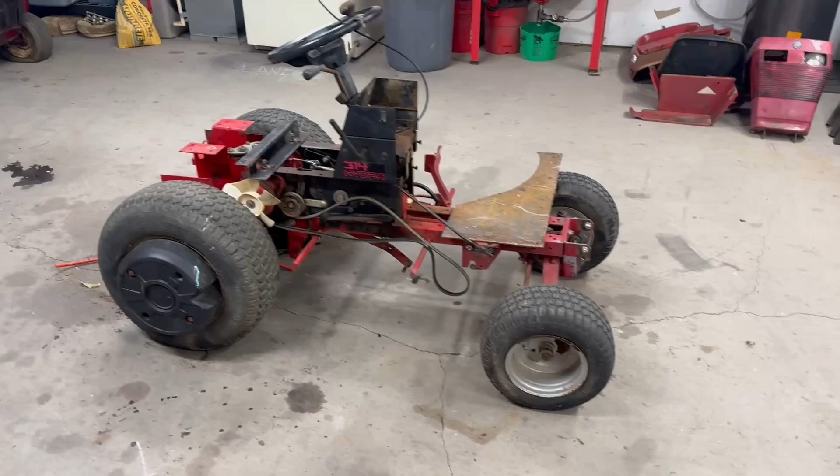We are back for part 2 of the 314 with a diesel swap. You guys saw in the last video, we got this thing stripped down, somewhat washed it, got it cleaned up, and I've done a little bit more work off camera, mostly because it's boring. I just pulled some more panels off and stripped a whole bunch of junk off this thing that we're not going to use anymore.

So as far as what we're going to try to get done in this video, we're going to hopefully get the engine fully mounted, get the belt drive put on it, and make sure all that stuff's working right. Make sure the transmission's going to work like it should. Yeah, so it's kind of time consuming work.

It's not difficult. If you guys are on the fence about doing this, it's not bad. I mean, it can't get any easier. These frame rails are nice and flat. It's not hard at all. But I'm going to go over how we're going to go about mounting this thing.

So anytime you guys go to do an engine swap, whether it be a Wheel Horse or a Lawn Chief, any kind of tractor that's got belt drive, you need to be aware of where the shaft comes out of the engine at. I'll show you what I'm talking about here. You guys can see on this Kohler here, from the faceplate or the bottom plate to the center of the crank is right at, I think that's about 6 inches. You go to the new engine, it's about 4 3/4.

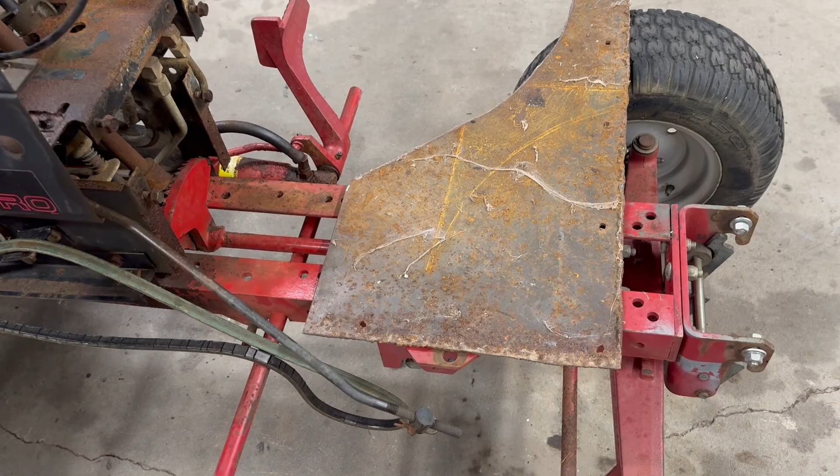Now that's important because whenever you go to mount this thing, if you do not have it centered where it was and the engine and the crank in the same position, your belt is not going to be routed properly. Now I want to retain the factory belt guards. I want this tractor to be as factory as possible when it comes to those systems. So to do that, you usually got to build a custom riser plate. Now that may sound complicated, but it's really not.

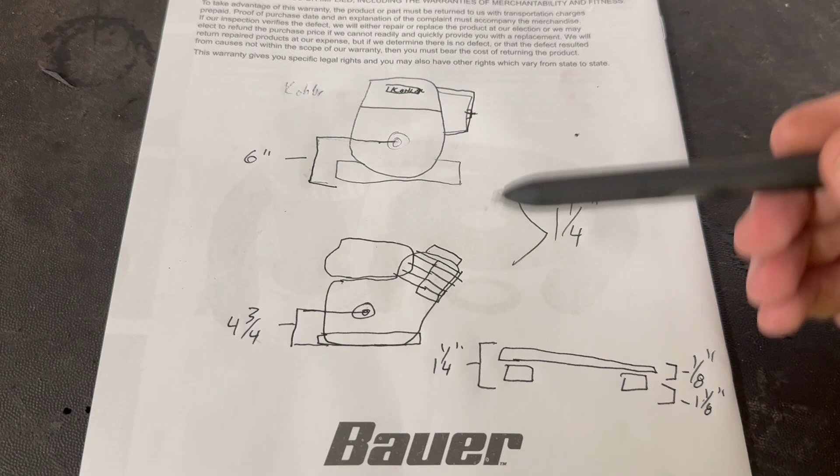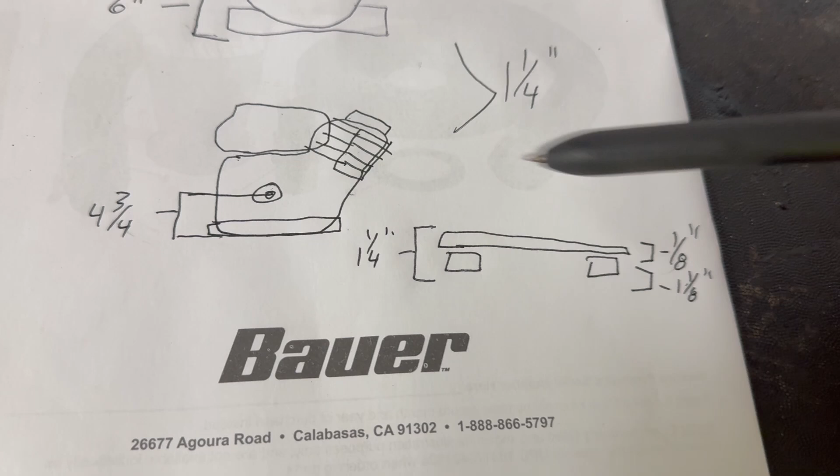So if you look at my crude drawing here, you can see the old Kohler was 6 inches from the base to the center of the crank, and the new engine is 4 3/4. So that means we have got a 1 1/4 height difference that we have to make up. So what I'm going to do, I've got an 1/8-inch steel plate. I'm going to cut a rectangle out of that, and I've got some thick wall round tubing. I'm going to cut some spacers that are 1 1/8 tall. So by the time you add those two together, that should make up the 1 1/4 difference. So the crank will be in the same position as the old engine was.

Now the other important thing to take into account is obviously making sure your engine is squared up to the frame, to the belt drive. We're going to go off the assumption that all that is parallel and squared up to the frame. So whenever we go to mount that engine, we want it to be square to the frame and in the same spot as the original one.

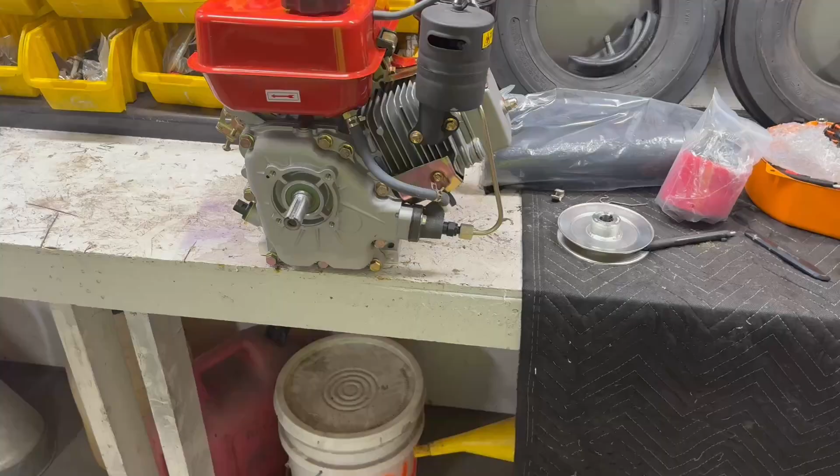Now these Wheel Horses make it a little bit easier because you've got the old bracket here for the old clutch. That is dead center to the crankshaft. So whenever we go to mount the new engine, we need to make sure it's the same height, it's square to the frame, and it's centered where the old one was, and our belt should mount right up and everything's fine.

Now, since I'm only going to be using this tractor to push the snow plow, I'm not going to be putting the original clutch back on it. This thing will never have a mower deck on it. It'll never have any other attachment besides a snow blade and maybe a grader blade. So that being said, pretty simple.

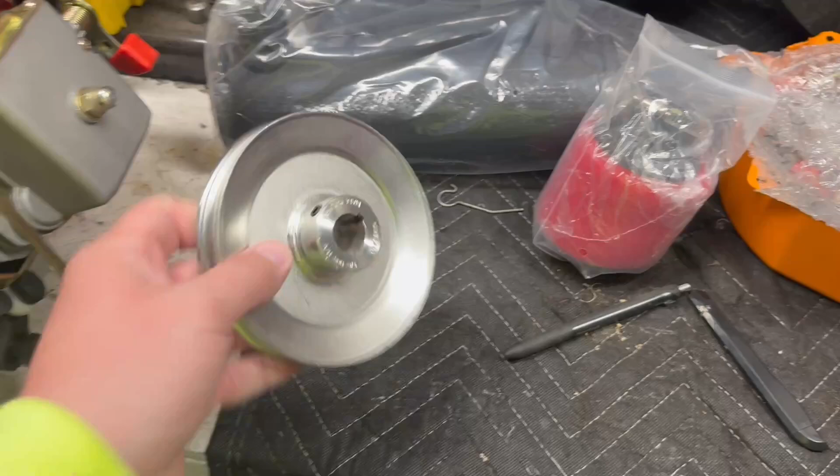This is just your standard, I think this pulley fits 4L and 5L belts. If you guys can see that part number there. This is straight off Amazon's website. This is the same thing you can go to Tractor Supply and buy off the shelf. But there's a problem. The crank on these engines is 20 millimeter.

Well, not a problem, I guess, but most standard pulleys you're going to find here in the States are going to be 3/4 or 1 inch, whatever. This pulley happens to be 3/4, which, if you guys are smarter than me, you know automatically. I had to Google it. 19 millimeter. So we're going to have to bore this one out to 20 mil to fit on the shaft.

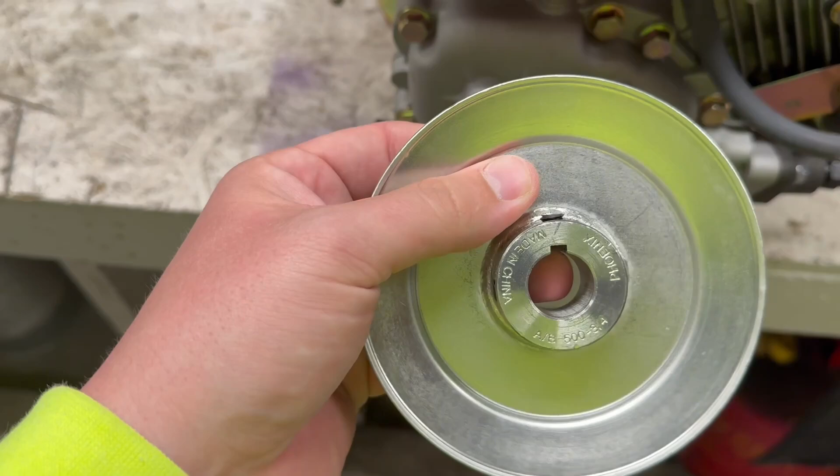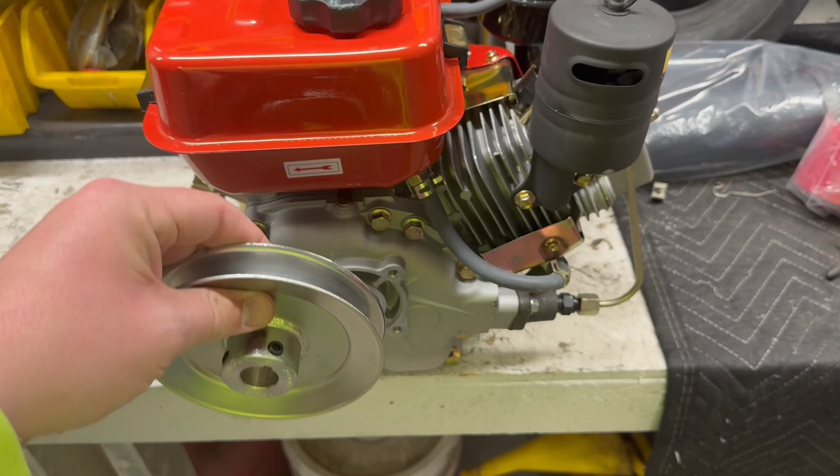Do a little shaving on the keyway to make sure that works. And yeah, so before I go mocking the engine up in place, I need to get this bored out, get this put on the crank, so I've got a nice flat plane to go off of for lining the belts up. So enough rambling, let's get to work and get this pulley put on there.

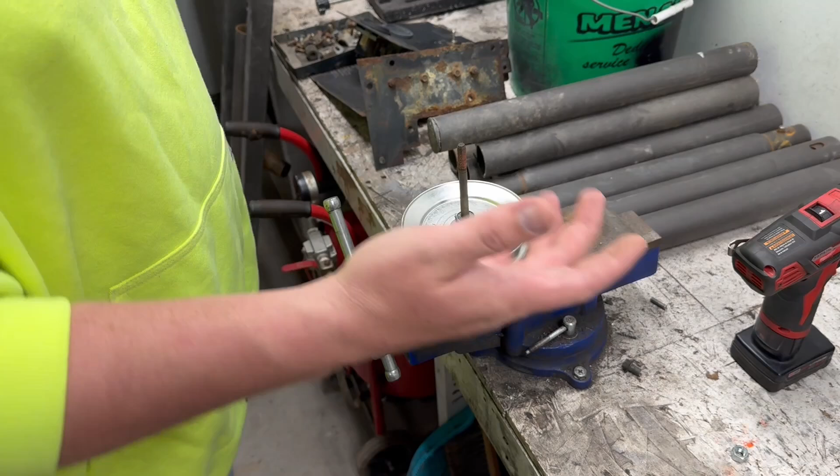All right guys, this is what I'm gonna try. I've got the pulley put in my vise here, and all I've done is taken a long bolt, put a slit in it, and I've got a whole bunch of Scotch paper or Scotch-Brite, whatever you guys call it. It's like 50 grit or something. It's a pretty aggressive grit. So all I'm gonna do is just use the drill and bore this out. We only gotta take 1 millimeter off, and that might sound like a lot, but I don't think it's gonna be that bad. I've got plenty of time to do this and plenty of Scotch paper.

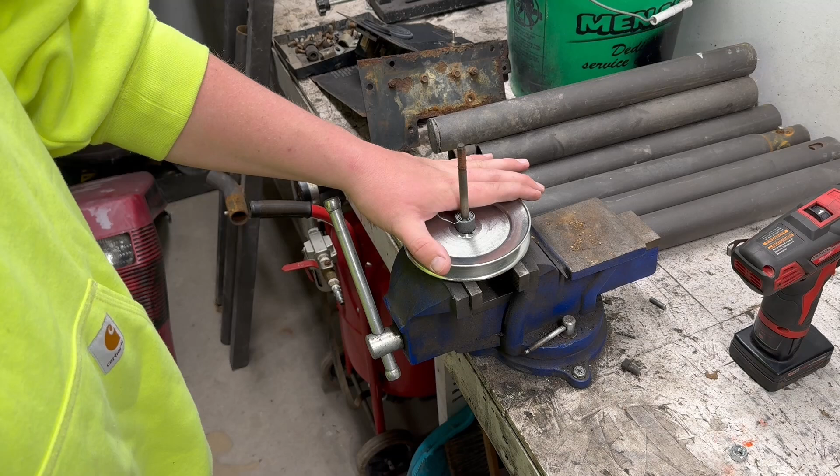So I did call a machine shop to get a quote on what he would charge to do this. And it was pretty insane. It was like $200 or something. So for $200, I could buy a whole lot of sandpaper for that. So we're gonna try this, and got my cheap calipers set up, so we'll get it close. And as soon as we get close to 20, we'll slide it on the crank and see what happens. So here we go.

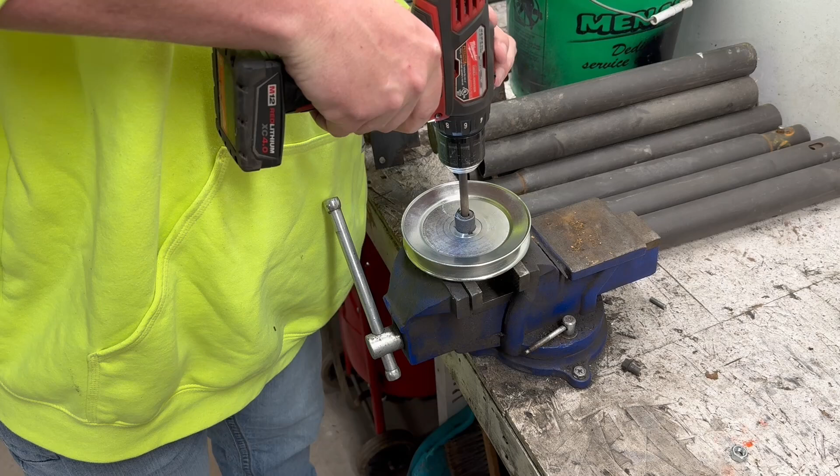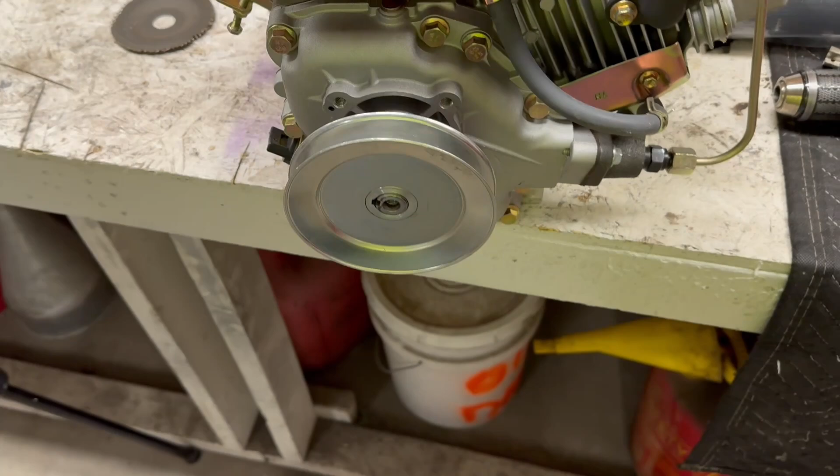All right, guys, after probably, I don't know, 45 minutes of going at this with my sandpaper rig there, and I even broke out the old die grinder with the burr bit, just to kind of do a couple rough passes on it and then shined it up. But we got it pretty good now, sliding on like I want it to. I am gonna have to do some modifying on a keyway. This has got some grub screws in it, but I've never really trusted those things to hold it in place on the crank. So I'll probably end up cutting a custom keyway to put in there.

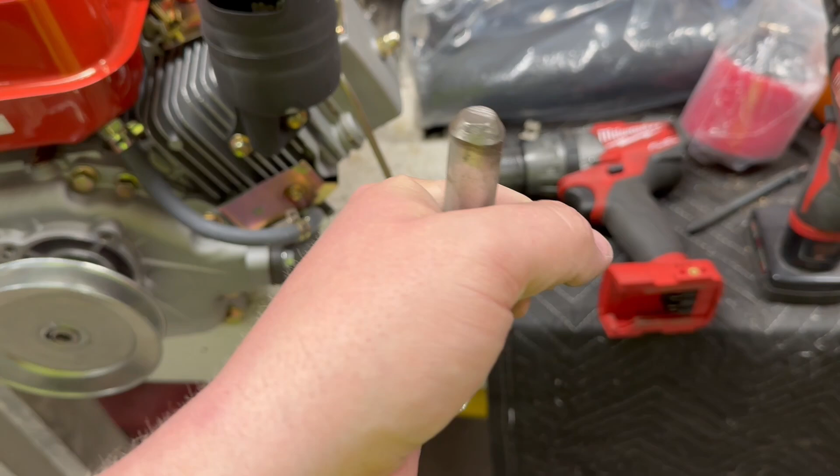But for any of you guys thinking about doing this to this pulley, couple suggestions. You guys saw I'm using this skinnier M8 bolt. What I would do, which I didn't have the ability to because my chuck is too small, get you a bigger bolt. That way you're using less Scotch-Brite to fill the gap to keep a tight fit. So the bigger the bolt you use for a chuck, the better results you're gonna have.

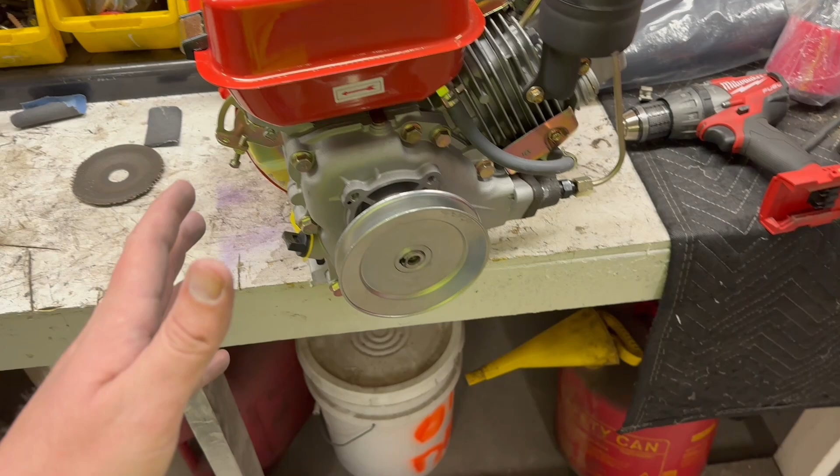Of course, the other option is to buy a 20 millimeter V-belt pulley. I didn't really spend a whole lot of time looking for one. I'm sure if I had, I could have found something that worked. This was cheap and easy, and I went that route. And of course, I'm sure there's a better way to do this. This is just what I came up with.

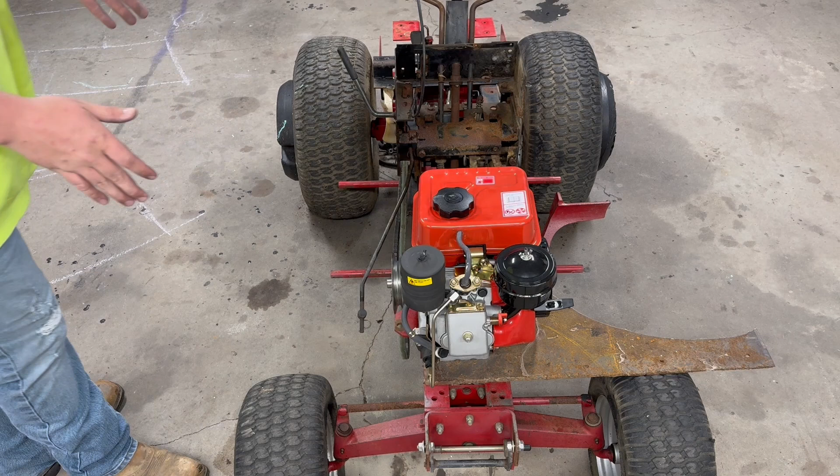So anyway, let's move on to the engine plate. So I mentioned you need to make sure you square it up. I told you guys about that hole in the frame so I can kind of eyeball the crankshaft. Now I got you guys set up. This is just rough. I'm just trying to figure out how big of an engine plate I need because I'm going to cut this one to size. I want to leave myself some leeway so I can adjust it if I need to.

So I think that's going to work. I think I'll be able just to cut an engine plate pretty much the same size as the frame rails. And we'll leave it kind of long so we don't have to drill any new holes in the frame. So let's get that plate cleaned up and get it cut, and we'll move on from there.

Well, guys, I tried the plasma cutter again, and I still got to get that new outlet put in the garage. The cord that's on it doesn't match my air compressor, and I don't know. It's a handy tool. It's just anything more than sheet metal, it won't cut running 110. So, going the old-fashioned way, use the death wheel. We'll see if we can't get this cut.

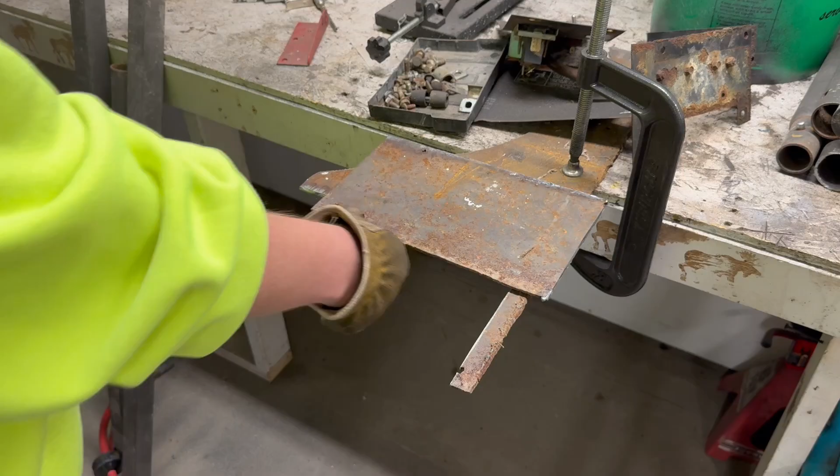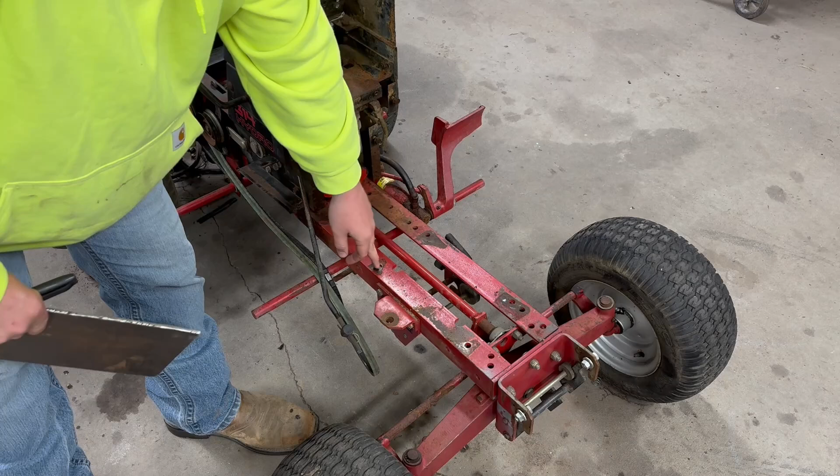Alright guys, we got the plate cut. I'll show you. These are the original mounting holes for the old Kohler. So I don't want to drill any more holes in the frame than I have to. So what I can do, and I believe we're going to be okay, if I drill 4 new holes in this plate where my spacers will sit underneath, we can bolt the plate to the chassis and we'll have enough room to bolt the new engine to the plate. So kind of hard to explain, but just follow along, it'll make sense. Got my holes marked. We'll drill these 2 out first.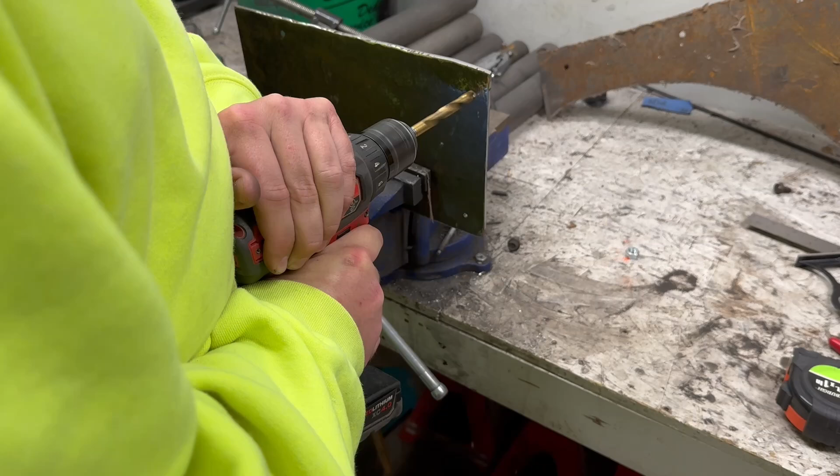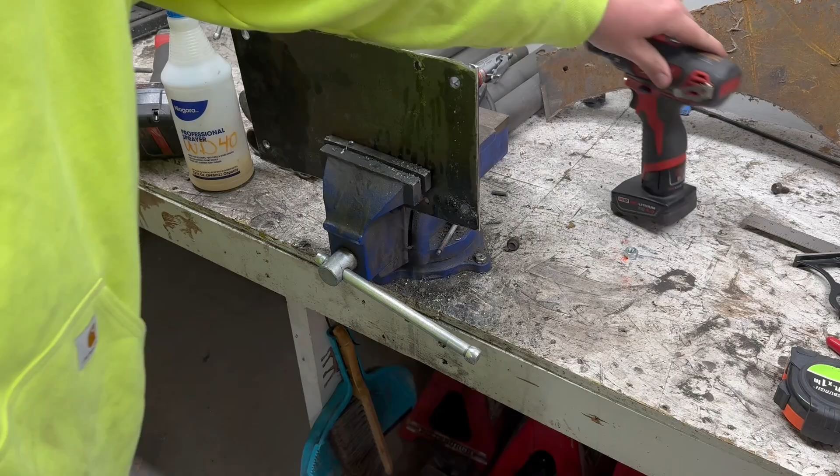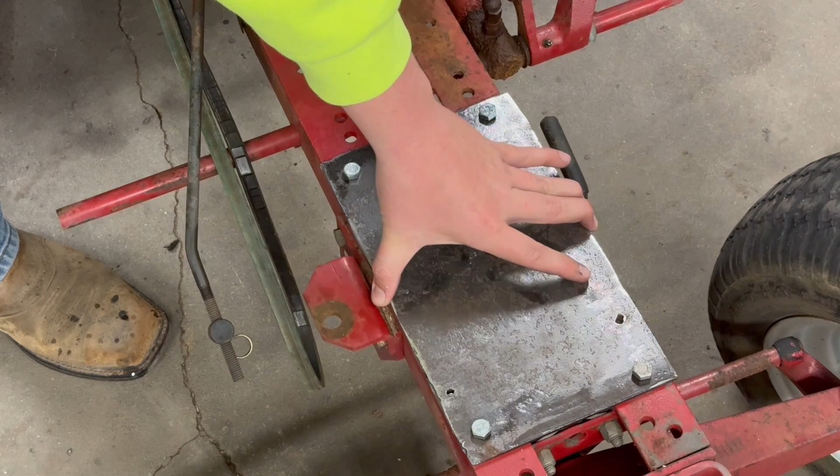Gets rid of the burrs. Well, let's see how we did. All right, not too bad. See, we still got a little bit of wiggle room too, which is what we want. So let's cut some spacers and get those mocked up and get those welded on.

All right, guys, I lied to you. That engine plate isn't 1/8 inch, it's actually 3/16. Once I clean the slag off, I could actually measure it. So that being said, my spacer pucks need to be 1 1/16 inches. I hope that's right, but you know, we got a little bit of leeway. So we're gonna measure this out the best we can and see about cutting this.

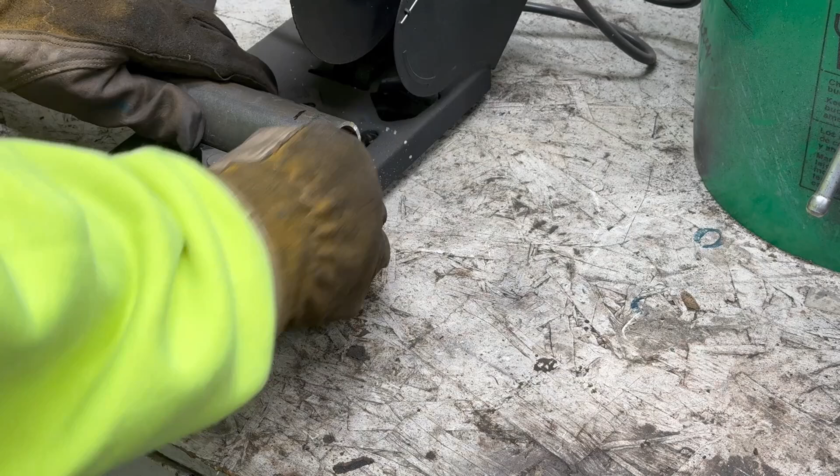This little saw here is just a little cheap Drill Master brand from Harbor Freight. It's better than trying to use a hand grinder, but not by much. Just gives you a little bit more control. All right, guys, got these somewhat cleaned up. Let's mock them up, see what we got.

All right, guys, all I'm trying to do now, make sure I get these pieces completely hidden underneath the plate. I don't want any of them sticking out anywhere. I think instead of trying to mark them and risk losing where they went, I'm just going to try to tack them in place where they're at, and then we'll get them on the bench and fully burn them in.

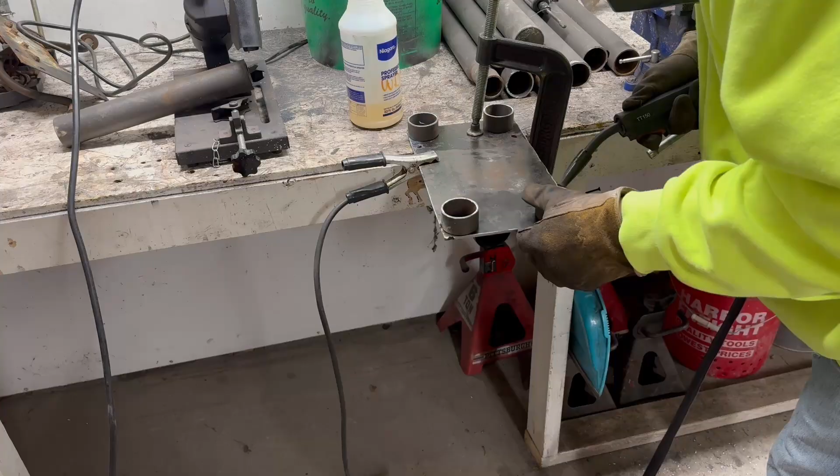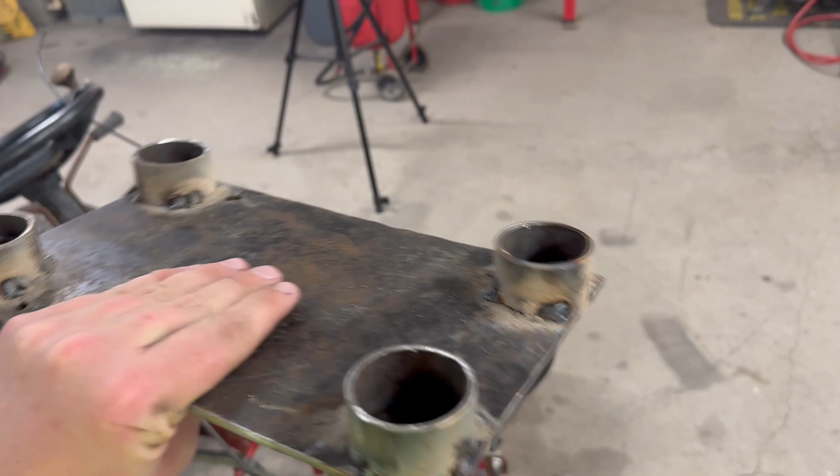All right, guys, I'm not gonna bother showing you my welds up close because trust me, they're awful. But those aren't really load bearing. They just need to not move. So I put some tacks on them. We will get this bolted down solid and then we'll repeat the process for the engine.

Now none of this is permanent, guys. I'm just mocking this up whenever I know it's what we need. I'm gonna end up painting it obviously before I fully commit to leaving it, you know what I mean? I'm not even going to use lock washers right now. When I bolt it down for good, it's going to get some nylocks. Well, this thing is lighter than that Kohler, but it's still not light.

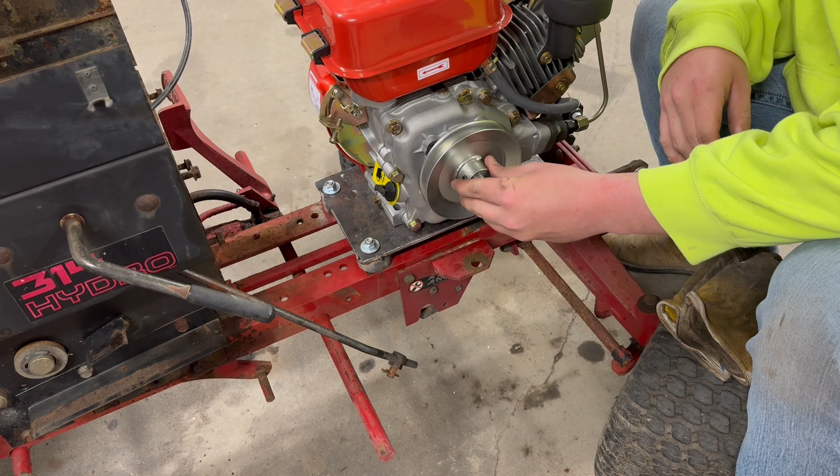Now, if my math was correct, we should be at, look at that. You guys can see that. 6 inches on the money. Perfect. Well, guys, I'm gonna spend the next 5 or 10 minutes here just getting everything lined up, figuring out how I want to mount this pulley, how far over to scoot the engine. So I'll bring you guys back whenever I've got the holes drilled and I'm putting some bolts in it. So see you in a bit.

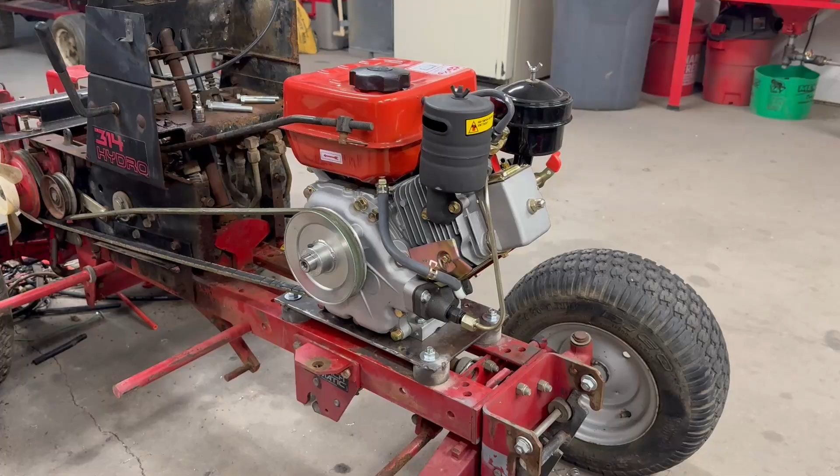Man, I cannot believe how productive I'm being today. Got it all bolted down. Again, this ain't permanent. All this stuff's gonna be getting nylocks. I'm gonna paint this engine plate and all that. But anyway, what do you guys think? I think it looks pretty straight to me, maybe kicked out a little bit. We can adjust that whenever we do the final mount.

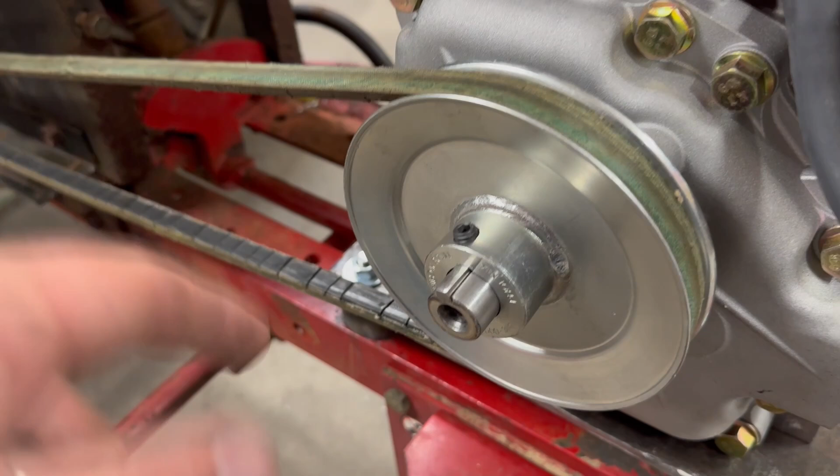But I also got my keyway put in here. So that's good. I was kind of worried after taking all that material out, my keyway wouldn't be deep enough, but worked out good. Shaved that down just a little bit to give me some clearance, and it went right in. So we're gonna go ahead and get the crank pulley put in. I think the next thing we're gonna do is find some old diesel fuel and see if we can't get this thing to come to life. So I'll bring you guys back for that.

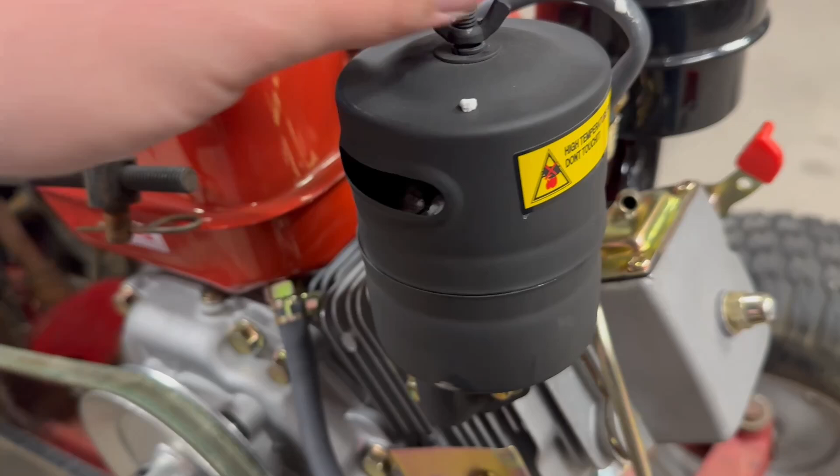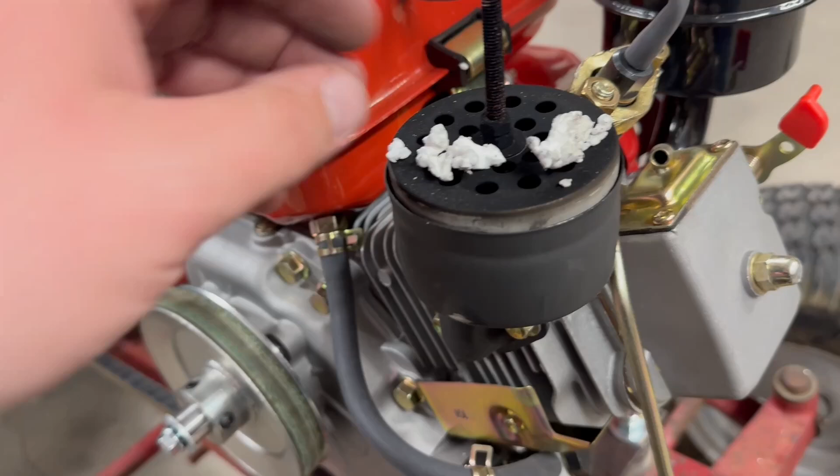I swear this styrofoam is everywhere. We're gonna pull this muffler apart and clean all that stuff out before we start this thing. Look at that. Huh, well, this engine's already been ran. Sure looks like it, don't it?

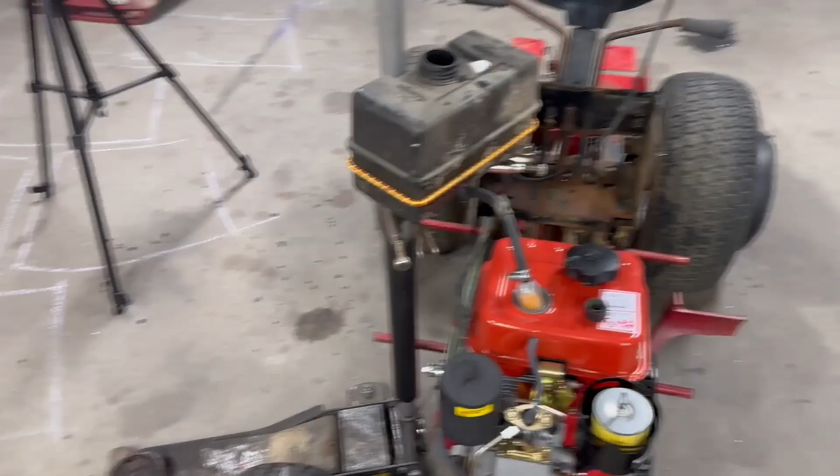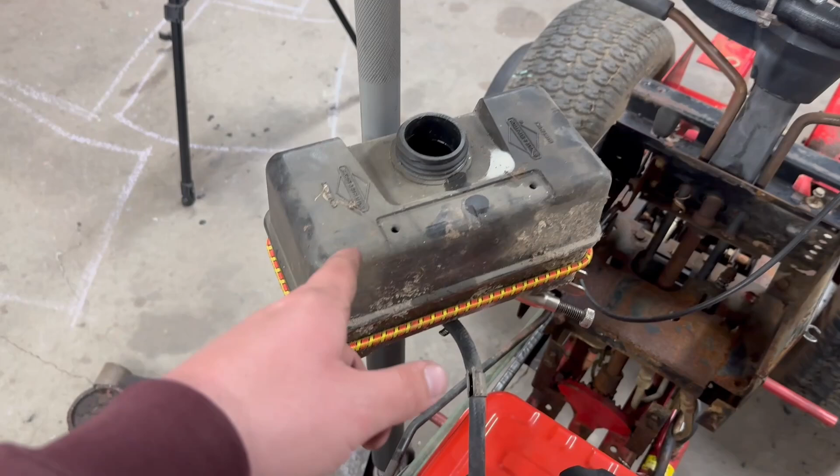Well, let me explain before you guys start making crazy wild accusations here. I managed to find a little bit of diesel underneath the shelf that's been sitting there for about 8 months, give or take. I did a fuel sump on one of my old Cummins. Anyway, had a bunch of junk in it, so I did the smart thing, got an auxiliary fuel tank with a filter, so I'm filtering that diesel fuel down into the actual diesel tank, and then hopefully we'll be able to start this thing.

I reckon I should probably put some oil in this thing. Might last a little bit longer if I do. Let's see, that's good. It's starting to run back out. Oh yeah, it'll make a hell of a mess. That's nice.

Well, I'm assuming this is like any other diesel. You need to bleed the air out of the fuel system, but you know, the Chinese being so thoughtful, they put this top injector nut right in between the valve cover and this muffler. So I either need to take the muffler off to crack that open. I think for now we'll just start at the bottom. You guys just keep watching down here.

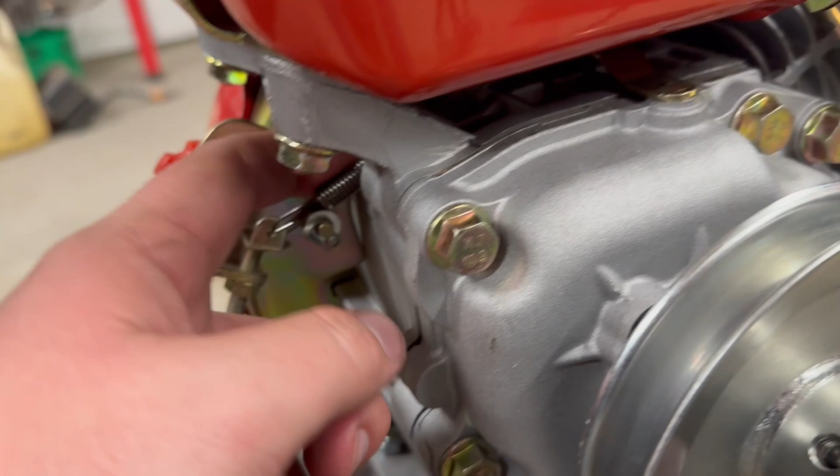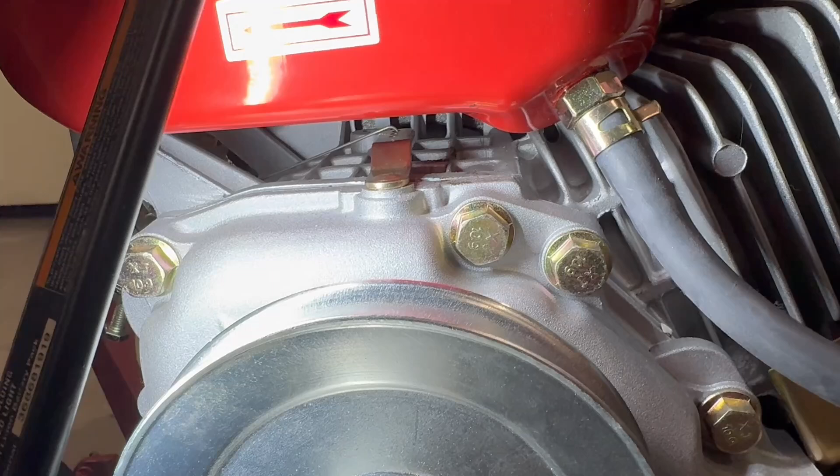You follow that spring up, you guys can barely see it. There's a governor arm in there. That's actually what controls the throttle. Well, hang on, let me get a flashlight so you guys can see this. All right, let's try this again. This little brass colored arm in here, that's the throttle linkage arm. Well, this throttle, when I pull it, it stretches the spring, but this damn thing doesn't move. So I think that's my problem.

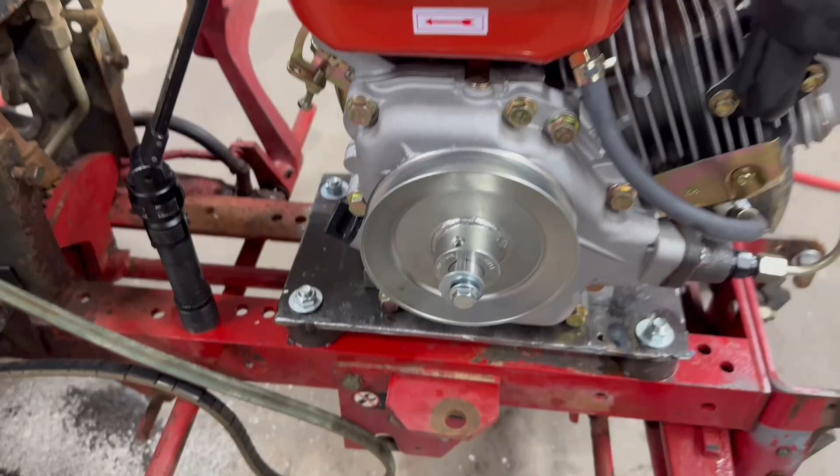The fuel is in off position and I cannot get this thing to move. So I'm gonna try to pry on it a little bit. Maybe they put some silicone on here to stop an oil leak and it's seized up. I don't know. So I'm gonna poke and pry on this and see if we can't get this freed up. Well, guys, I poked and prodded and pried and pushed and bent and cussed and threw tools, and I could not get this governor arm to move.

So I did find a guy, because literature on these things, I know it's out there, but I'm having a hard time finding parts diagrams and stuff. But I found a feller on YouTube. I think the channel is Mossy Creek Vids or Mossy Oak Vids. And he's got a very detailed teardown series of one of these. And from what I can tell from his video, this governor is attached to an arm that runs down to the unit pump here. And that is supposed to move freely, and it slides that plunger in and out of that injector to control fuel flow.

So either that rod has popped out or jammed up, or there's a washer stuck in there from the Chinese factory, or this pump itself is seized up. Something's going on. So I think the next thing I need to do, unfortunately, is dump all this oil back out that I just put in and pop this side cover off. I think that's going to make the most sense instead of trying to pull this injector, because I don't think you can pull this without pulling that first. I might be wrong, I don't know. So that's gonna be the next thing we get into.

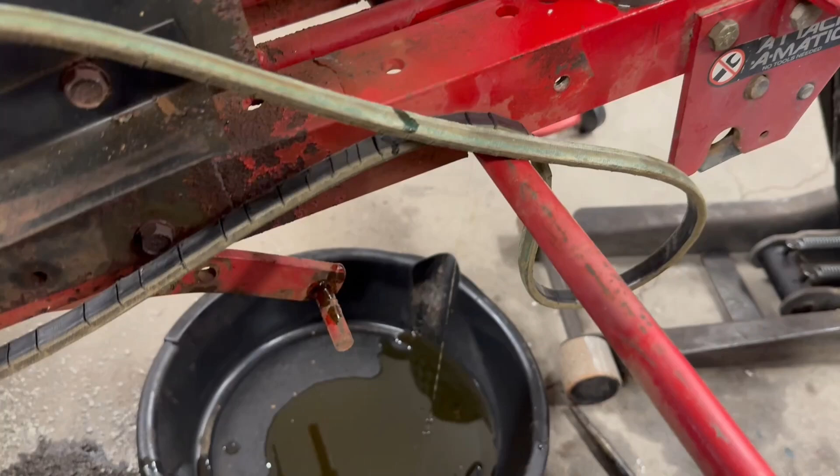Yeah, this is going about as good as I thought it was gonna go. I need to remind myself to get an oil drain extension for this, because this is gonna be a problem.

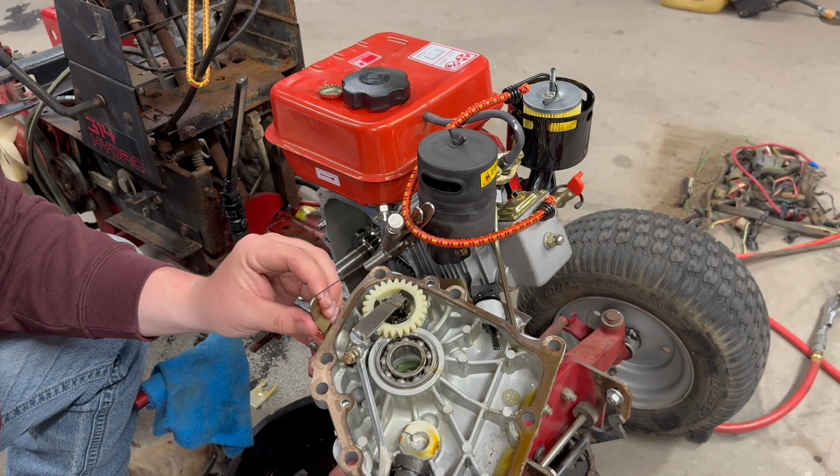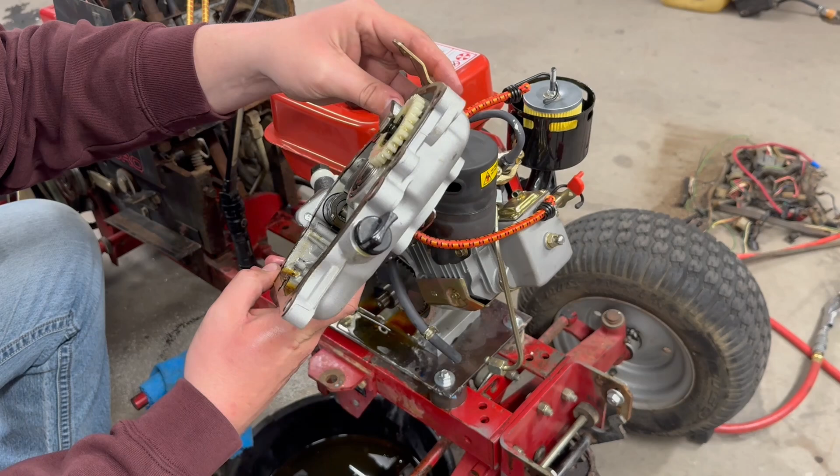You guys can see that or not. But yeah, like I was saying, this is locked up tighter than a drum, and it's supposed to move freely. Let me get this cleaned up and get it situated so you guys can see what I'm doing here.

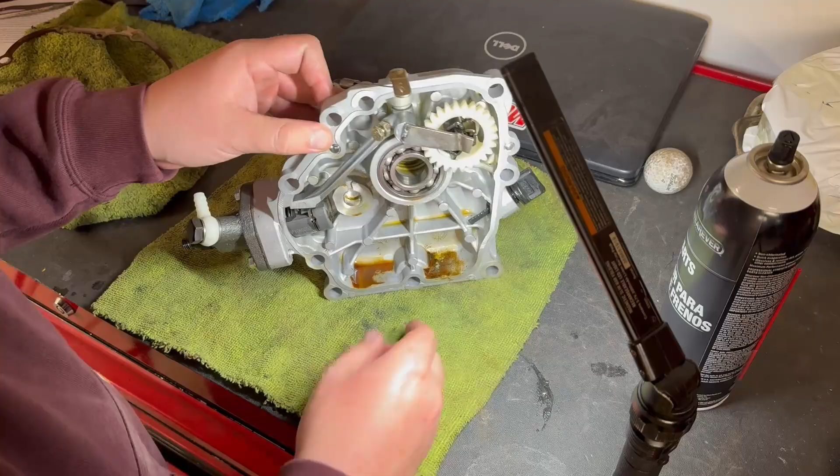Guys, at the bottom of this, it's got this nasty goop stuff. I don't know if that's old fuel, but I'm starting to wonder how long this thing actually sat in the warehouse. Let's take this off and we'll see if this injector's froze up, because if that's the kind of stuff that's sitting in that injector, that might be why it's not moving. I mean, it is just downright sticky. I don't know what it is.

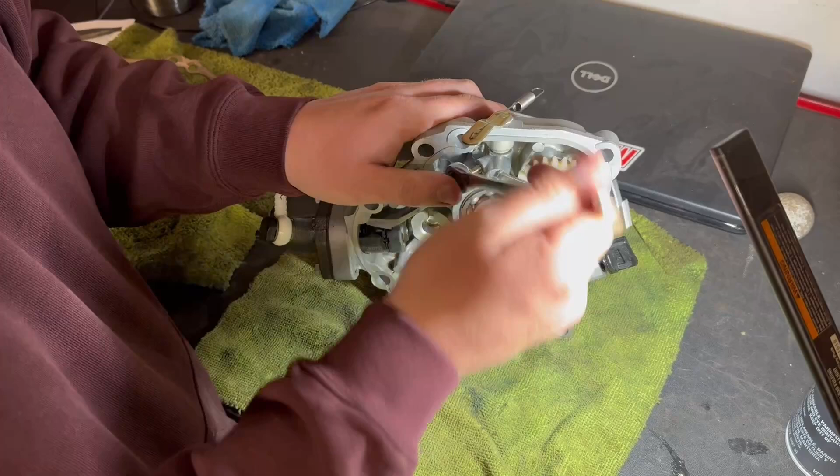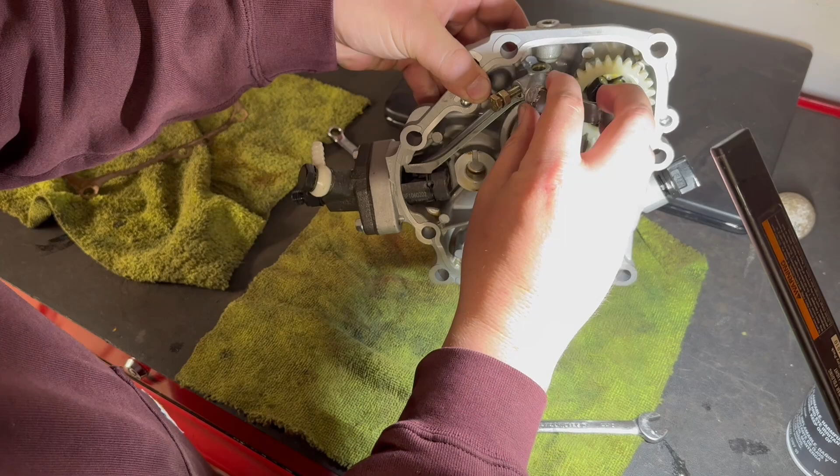If you guys can see that, there's a little plunger back in there that this fork goes against. Oh yeah, that's locked up tighter than a drum. As this pivots against that governor, it's on that shaft down in there. It's supposed to walk it out that way towards the camera, and it's not moving.

Well, I guess we're in this far. Let's go ahead and take the governor out. They did machine a little groove in there so you can get this out. That's what we got.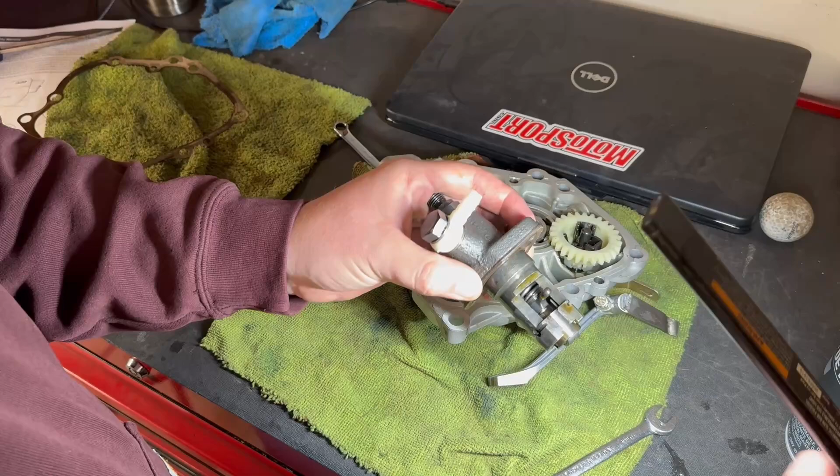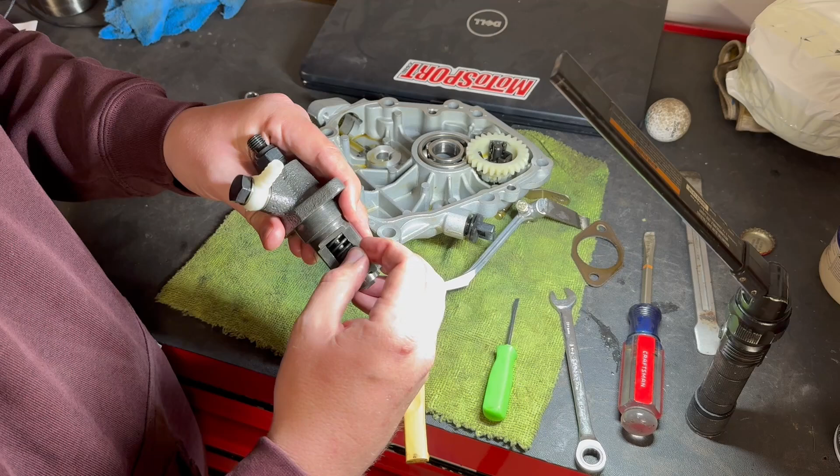But guys, I just spent the last 10 minutes going at this thing with some WD-40, just working it. You can see how easy that moves now, and this plunger was actually stuck. I'm assuming that'd be all the way, well, if it pushes all the way open, closed, I don't know. But now you can see it's moving freely. The throttle or the fuel control is working properly. I think everything's moving freely.

I don't know. I just think this thing has sat for a long time with some crappy diesel fuel in it, and it just gummed this thing up solid. I don't know, it's working good now, I think. I guess we'll see if we can't get it put back together and try to start it again. Success. Okay. All right, guys, I think the torque spec on this is about 2 ugga-duggas.

All right, guys, side cover's back on, fuel line's hooked back up. I'm leaving this one off for now. I'm gonna pull the engine over a few times and just make sure that I get all that WD-40 flushed out, and hopefully it's fixed. So we should know pretty quick. There should be quite a bit of fuel that starts coming out of that open injector. So let's see what happens. Oh, I did get oil put back in it too. I didn't want to bore you guys with watching me do it again.

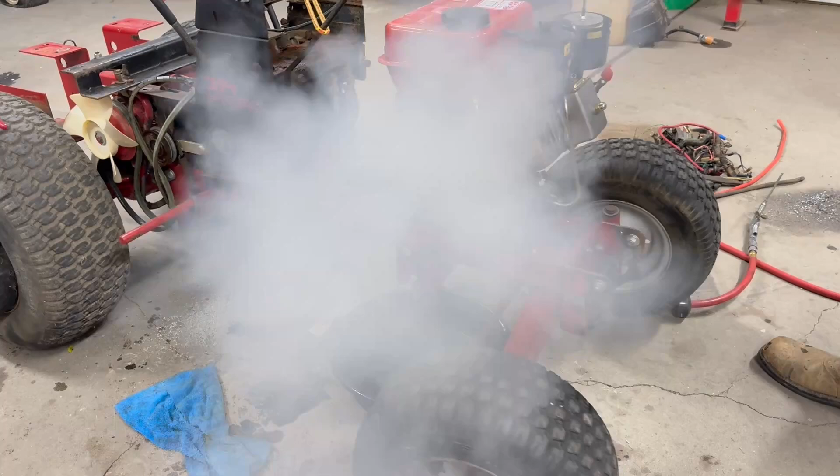Oh, we got some coming. All right. Oh yeah, we've already got fuel. All right, guys, are you finally ready to see if this thing will run? Trying a few more times for good measure. Hear that injector opening and closing now. Well, that's a start. Let's try again.

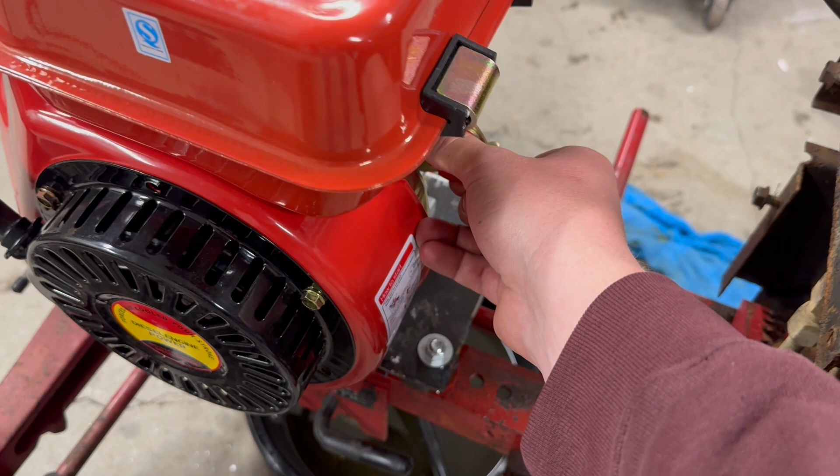Hell yeah. Man, has this thing been a struggle. I'm so glad to hear that thing run. Well, it is the next day, guys. Just came out here a little bit ago, and boy, did I make a mess last night. You guys know how that goes. Something ain't working right, you just put your head down, throw tools everywhere.

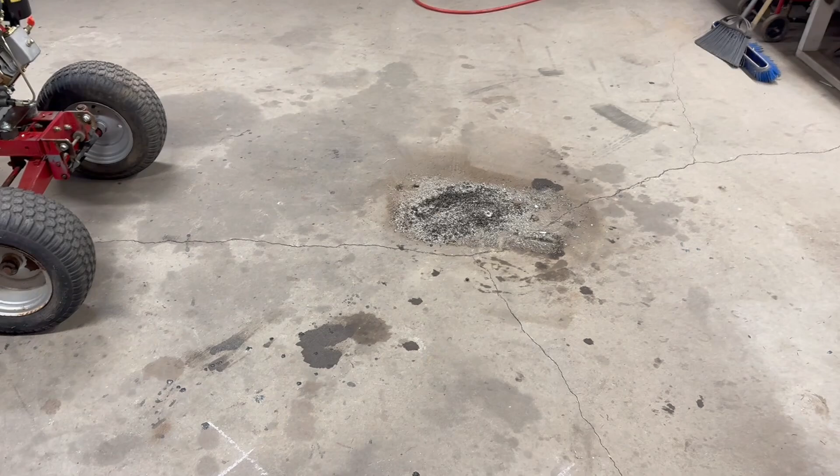So I spent some time cleaning that mess up, and I've got this thing somewhat rigged up to where we should be able to test drive it. So I had to do some shady work on the throttle linkage, but none of this is permanent. All this is gonna come back off, and don't forget, we've got an electric start to put on this, and that actually changes your throttle cable bracketry anyway.

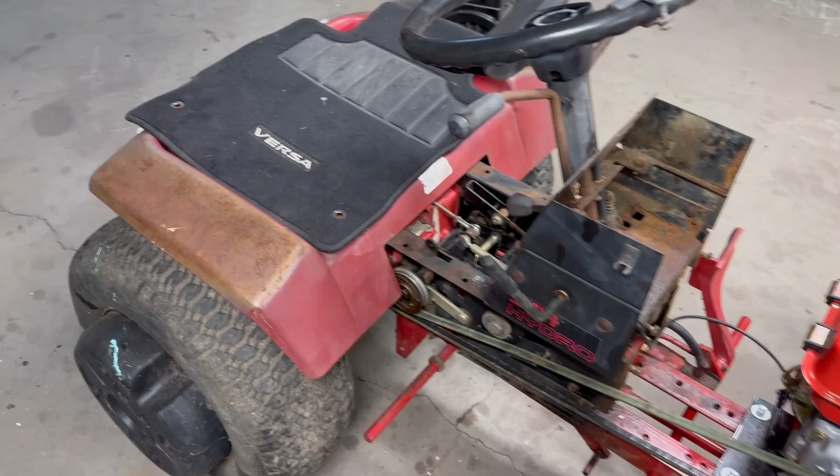So I got the belt put on, got the rear fenders put on just so I got somewhere to sit. Got a nice car floor mat to protect my ass from this stuff underneath. I don't know, let's fire it up and take it for a cruise. Pulled the wrong lever.

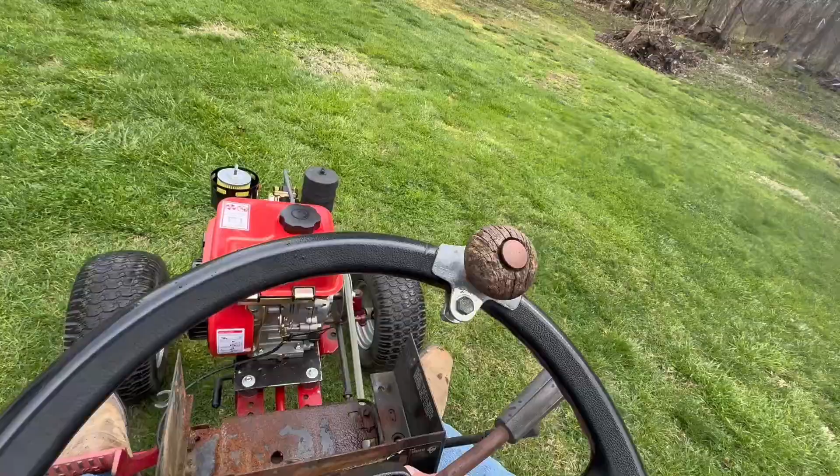Well, I don't know about you guys, but I'd call that test drive a success. This thing is just, I don't know, only ever messing with the Predator engines and these Kohlers and gas engines. I mean, I've had diesel pickup trucks and I run equipment for a living, but there's just something weird about this thing when you're riding it. I don't know. It's cool.

I'm happy with it. I did notice that we kept kicking the drive belt off. Kind of figured it's pretty worn down. I'm sure it's stretched. So I was trying to get a new one. I found one, gonna get that ordered. So yeah, as far as the first test drive, I think that went pretty smooth.

Well guys, that is gonna do it for this episode on Laid Off Garage. We got the engine all mounted up, we got the belt drive put on it, and we took it for its first test drive. And for the most part, it was a success. Drive belt kept coming off, but that's nothing to worry about. So I've got a whole bench full of parts waiting to go on this thing.